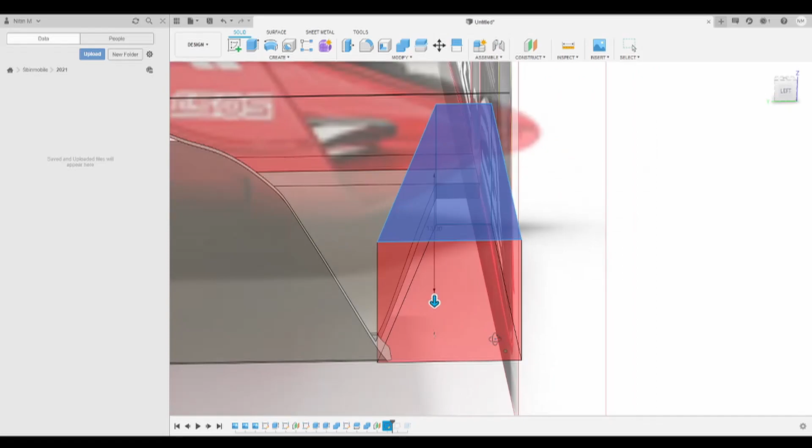After extruding this sketch, I then sketched out the profile of the winglet and cut it from the side of the extrusion. I then cut the shape of the base plate using sketches, added a fillet to create the blended end plate appearance, and added a little flow device to the end plate.

It was at this point that I started to follow the canvas maybe a bit too closely, and you'll see why later. Anyway, I cleaned up some artifacts from all the cutting, sketched and extruded the nose, and cut it at an incline according to the canvas.

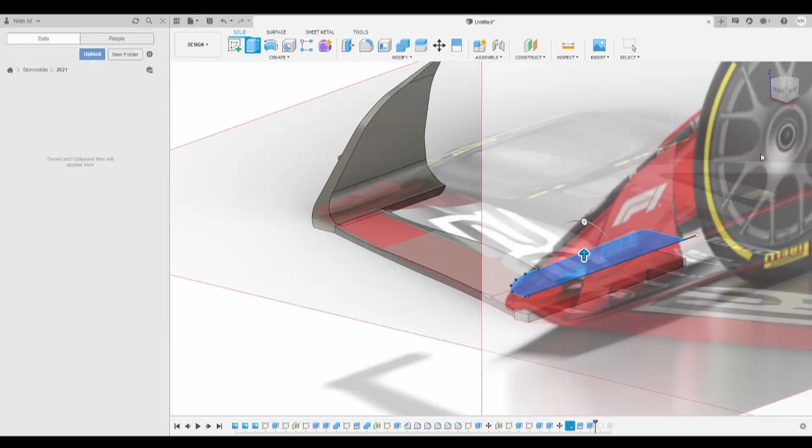I then offset a plane and placed it above the base, which would be used to form the first wing element. I repeated this twice for a total of 3 elements and created a first iteration.

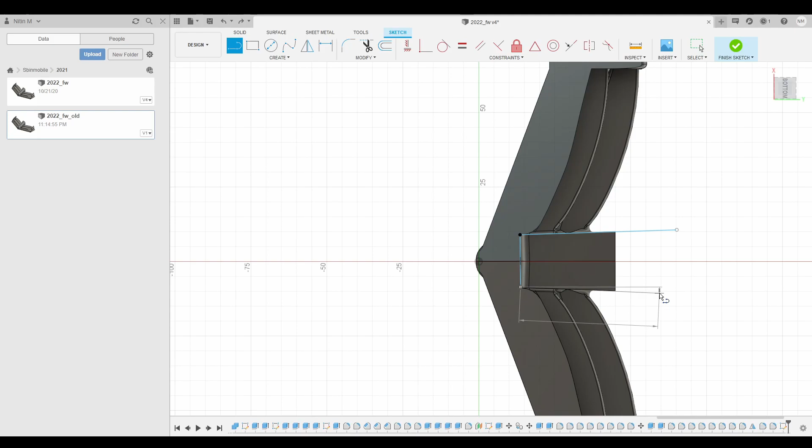I stopped work for a while due to being busy with university work, and when I got back to it a month or so later, I realized that printing would be a pain with this design due to the inclined surfaces and overhangs that would need lots of support.

So I went to patch up these gaps with fresh extrusions, but I was starting to realize that may not be enough to correct the issues with the model.

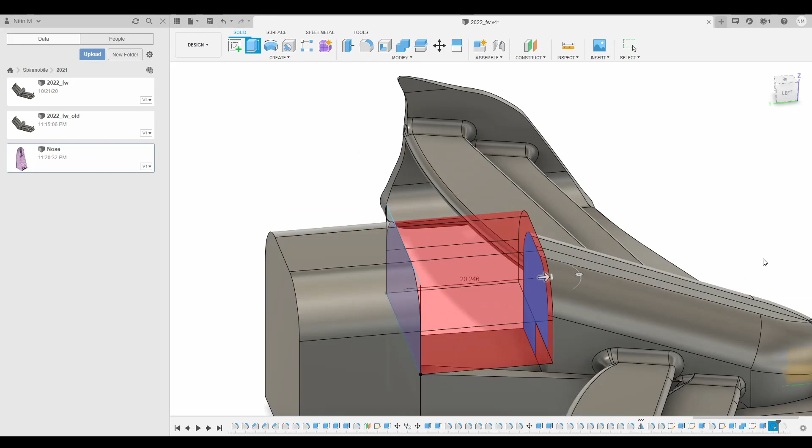The final straw came when I decided to add a nose to the front of the car, and I just couldn't figure out a way to add it cleanly. It is infuriating to work with, and after 40 minutes of trying, I decided to scrap the file and start afresh from where I built the canvas.

For this attempt, the major change to my workflow was to go with the path with least detours and cleanups, and in general just a much easier to understand workflow. I also accepted that there was a lot for me to learn in the long run from this, and decided to open up to using more Fusion features than just the extrude and sketch tools which I was familiar with.

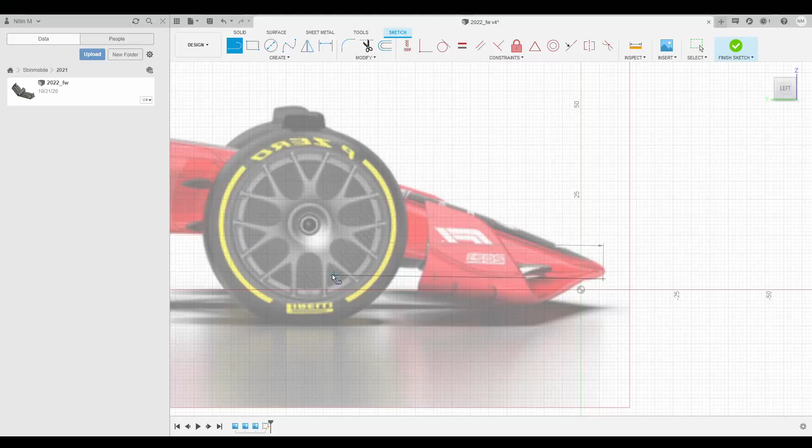I started with the nose this time, sketching and extruding a basic shape from the side view. I then added the base of the wing from the top view, which would give a flat bottom, ideal for printing. Then I duplicated and offset the base plate to create rudimentary wing elements.

These were then cut according to the top canvas to avoid colliding with the front wheels. I then sketched out and extruded the end plate from the side view.

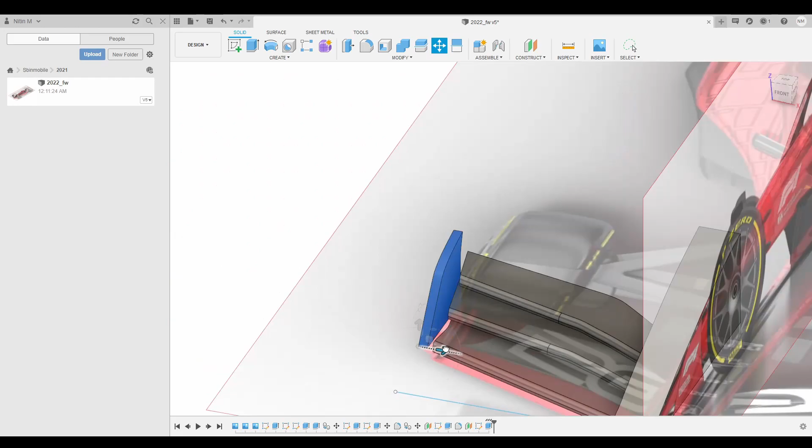After offsetting it to match with the wing elements, I joined the end plate to the wing elements and cleaned up some minor artifacts, which was a lot easier to do this time due to the flat nature of the bodies.

After adding some fillets to the wing interfaces, I cut the nose according to the top canvas and then filleted it to give it a smooth look.

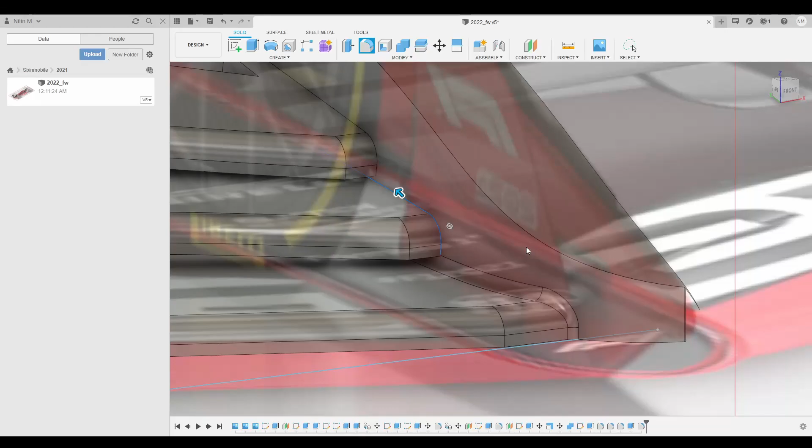After adding some stopgap bodies to join the wing elements to the nose, I mirrored the design so I'd have a checkpoint before which any edits will be applied symmetrically to both sides.

I really liked the look of what I had so far, as it was much cleaner than my last attempt and took considerably less time to create.

I added a cutout to interface with the chassis, along with a hole for an M3 bolt to be screwed into. If you're wondering, this is to ensure reverse compatibility with the original OpenRC F1 chassis, and my aim is to make this an iterative improvement which won't need reprinting of the chassis, motor and axle assembly and suspension.

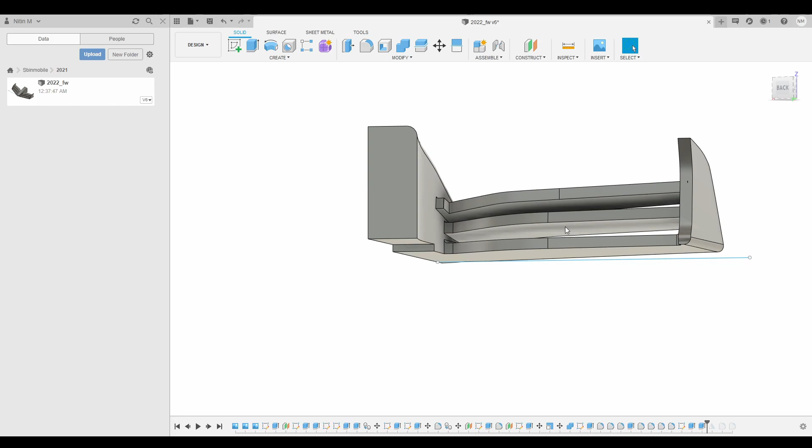I'll also be designing a custom chassis later on with some personal touches, like trying to take more advantage of the ground effect phenomenon, like the real deal.

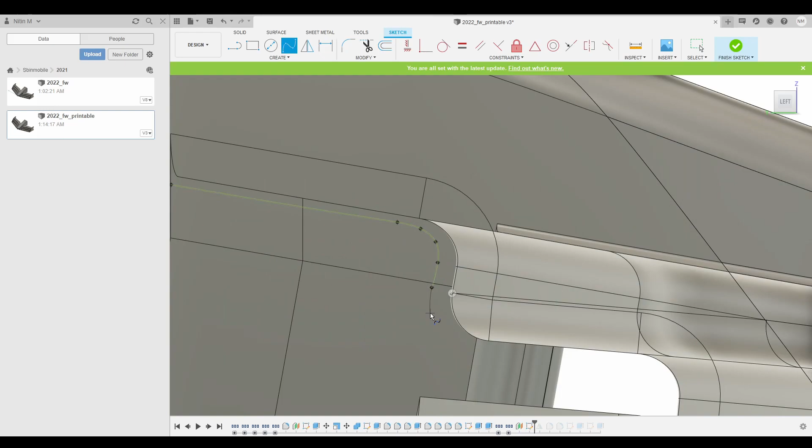After another cleanup to remove some minor defects, I created an extrusion from the top element to the bottom. This was an attempt to make the wing supportless by connecting overhanging parts to the main body, reducing the support requirement. To do this, I cut a section out of this new extrusion, offset from the top surface of the joined wing, to give a shell of the wing on top.

However, the test print of this version had the top element snap off, and the support usage was still quite high. It later turned out the top element was far too thin and welded to the support. To solve this, I made the top element thicker by modifying the way I cut the solid wing earlier.

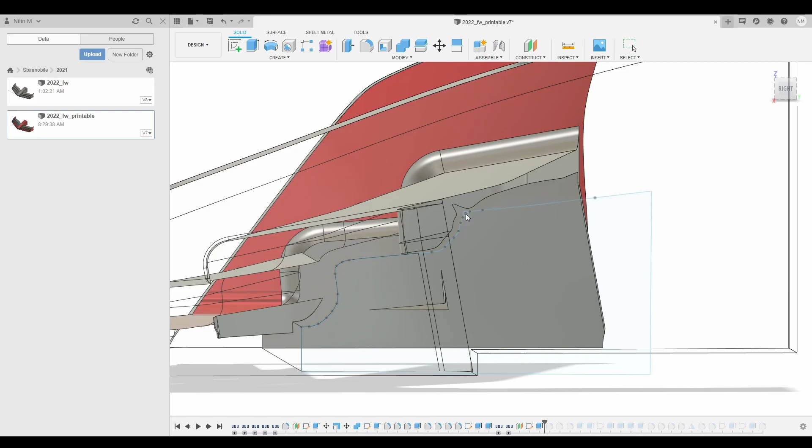That, however, caused holes to form in the middle element when printed. At this point, I was starting to run out of patience with the supportless idea, mainly due to the fact that, ironically, it was taking a lot of support to give even mediocre results.

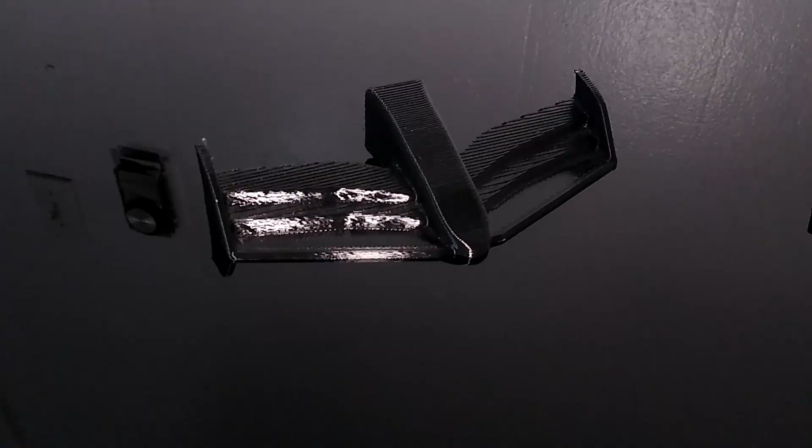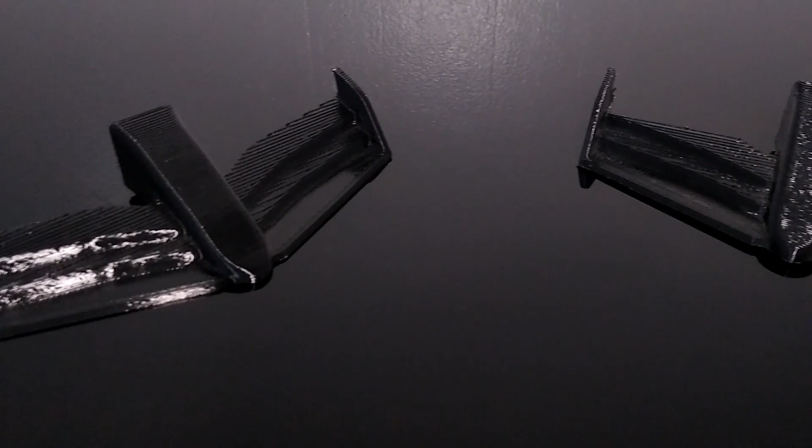This was partially due to me using a 0.8mm nozzle at that time for a trial, and as I was too lazy to remove it and a little curious how the prints would turn out, I printed it at 0.48mm layer heights, which is massive for an FDM printer.

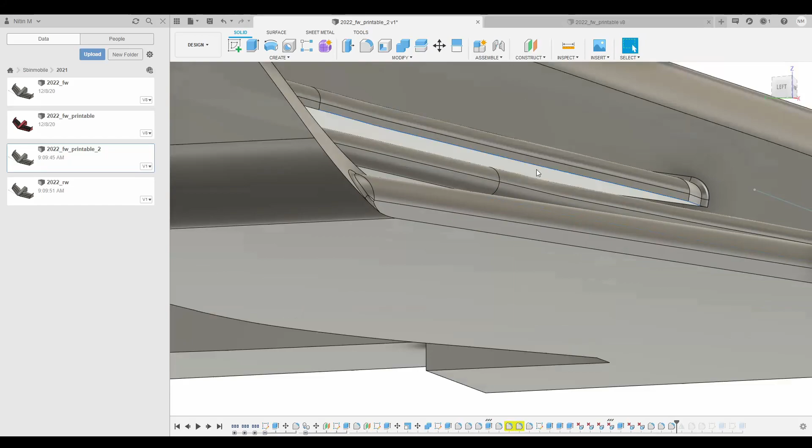However, I then had an idea. I created a copy of the file and reverted to before I made the wings supportless. I made a few modifications, mostly just making the elements thinner. This was then printed vertically so only the bottom of the elements was supported, along with a thin strip to support the chassis interface. I also tried to make the top surface curved to make it look interesting.

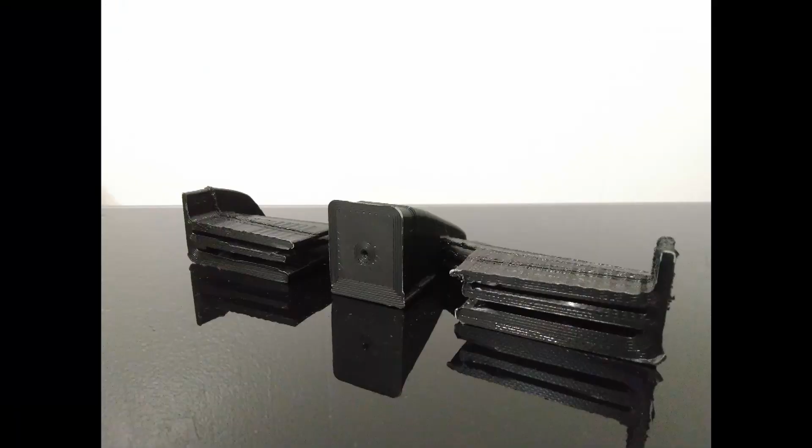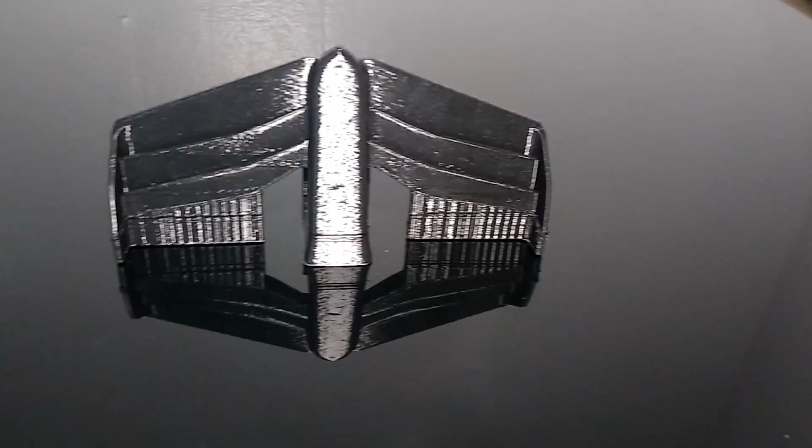And success! Sort of. It turned out printing in this orientation took far less support, and it also printed the M3 bolt holes cleanly, which was a massive pain in the previous version. The supports did weld themselves to the model, but that's unintentional, as I had swapped out the 0.8mm nozzle for 0.6 and was still dialing in the profile.

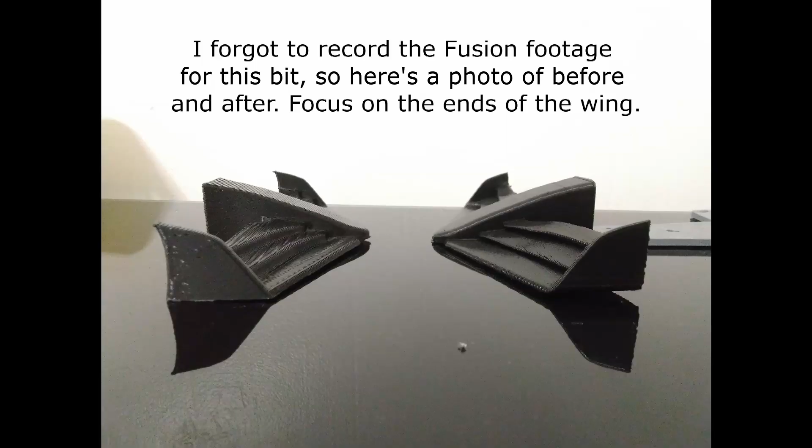This print was a sort of test dummy, as I knew it most likely would need more changes to be acceptable. And it did need some changes. I flattened the curved backside of the end plates, as it caused blobs to form while printing the pointy bottom, which interfered with the rest of the print.

I also removed those dents in the front wing and instead went with the loft tool. To use this, I cut each element into 5 segments, hid a couple of the longer ones, offset and rotated the remaining sections, and then lofted between their cross sections.

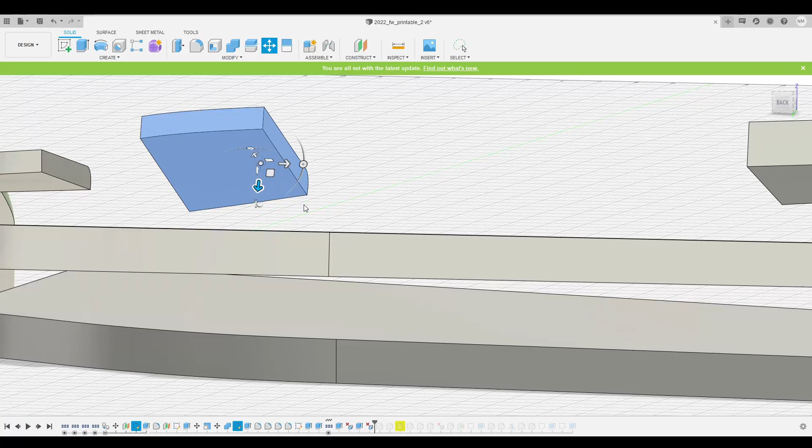The profile that came from this was frankly amazing to see the first time, and I was super happy that I discovered how to use this tool online. I owe the Fusion community for having so many tutorials to look up whenever I had a doubt, so big thanks to you guys, and keep posting.

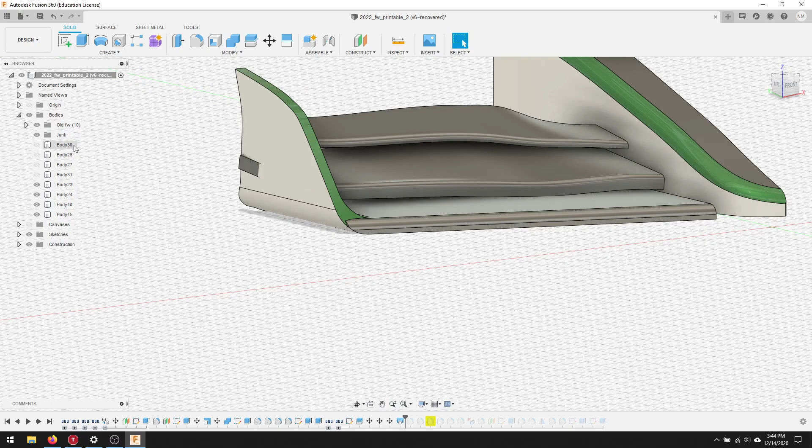Anyway, after playing with the loft tool for a bit, which included making the elements even thinner so they didn't fuse with each other when lofted, and adjusting the loft angle to give the elements a visible but easy to print curve, I printed this version and it looked great. After dialing in the slicer settings, the supports came off with a bit of persuasion. I'm sure with better support settings, this will be easy to print and process.

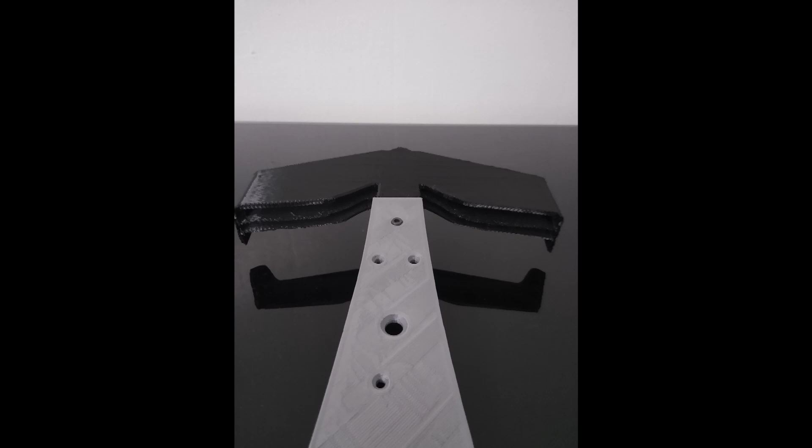I then fitted it onto a spare OpenRC chassis I had left over from when I built my own OpenRC F1, and it fit exactly as planned, and I gotta say, it looks neat. I can't wait to see the whole car completed, and finally getting this done has spurred me on to make the rest of the components.